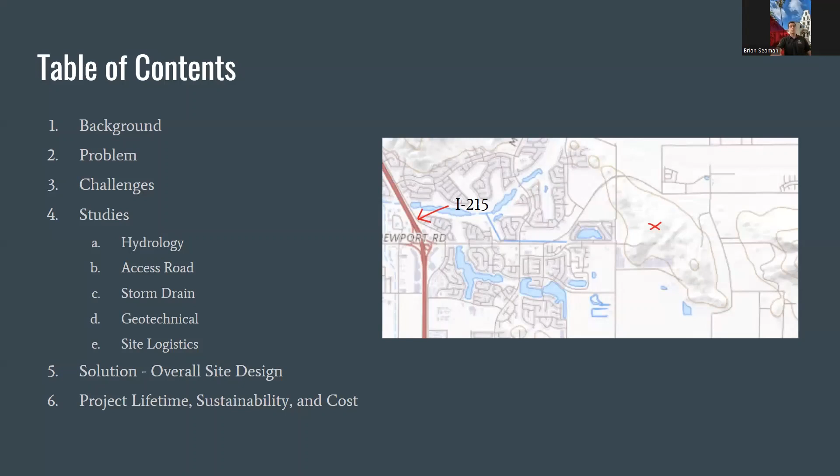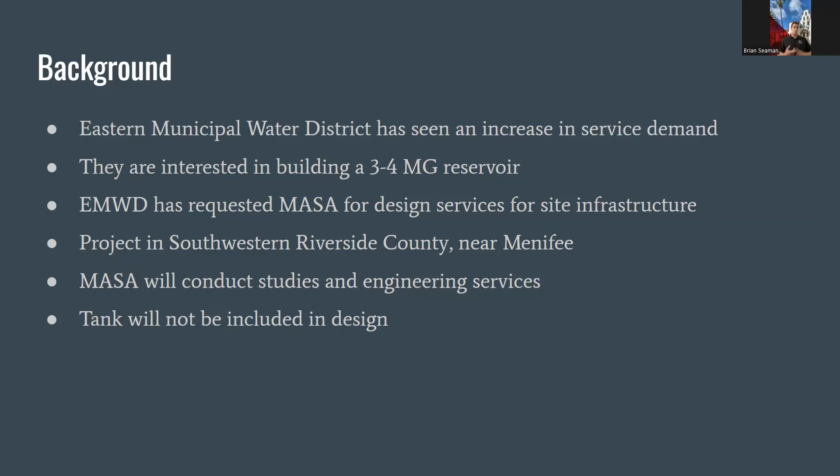So talk a little bit more about what we're doing here. Eastern Municipal Water District is a water district in southwestern Riverside County who currently operate about 80 water reservoirs. These are anywhere from 3 to 4 million gallons. We'll be doing a site civil infrastructure design for a 4 million gallon reservoir located in southwestern Riverside County near Menifee. And again, the tank will not be included in this design. This will be just looking at access road, ring road, and site civil needs such as storm drains, water mains, etc.

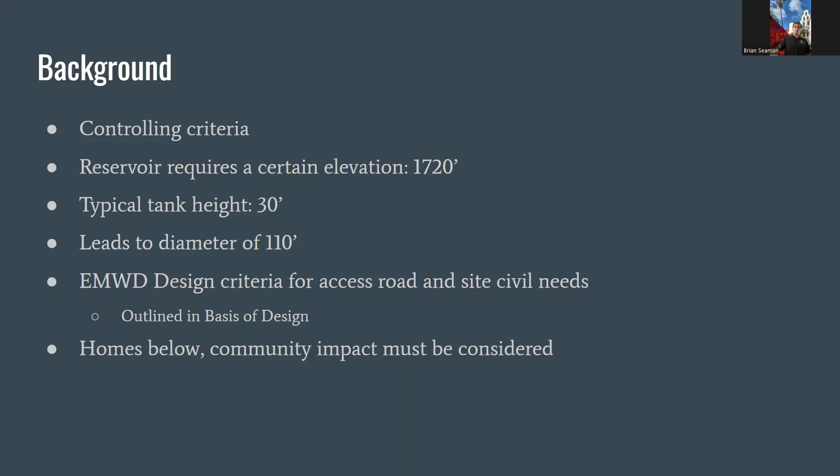Specific to this project, each water tank that EMWD is doing requires a high water level. And this tank's high water level is 1,720 feet. So typical tank heights are shown on the screen, and these are going to lead to an elevation, which is going to be 1,690. So that's a location that's going to be important on this hillside to be looking at because we need to be at that elevation for an effective design. Furthermore, below this hillside, there's some homes below, and we have to think about the community impact when we're doing the design for this project. So I'll pass it off to Blake to talk a little bit about the challenges of this project.

Yeah, so some of the challenges on the project was one, there were some radius issues when we were designing the access road. There's also challenges due to the terrain of the hillside that the access road was going on. There are also visual impacts to placing the tank and the access road on the side of the large hillsides. There's also issues addressing sustainability due to the project not being fully complete. And the type of soil on the project site also presented a challenge due to runoff.

So some of the studies we performed for this project were access and ring road studies. We also did a geotechnical study. We performed hydrology study, storm drain study, and also created a site logistics plan.

Moving into the hydrology study, the first thing we identified was that our site's located near a tributary to Lake Elsinore. That is Salt Creek, which you can see outlined in purple, with the floodplain area. This can present a big risk for debris runoff going into the drinking water, as well as other pollutants, as well as a flood risk for surrounding communities. So it's really important that we keep all the water that comes off of our site contained.

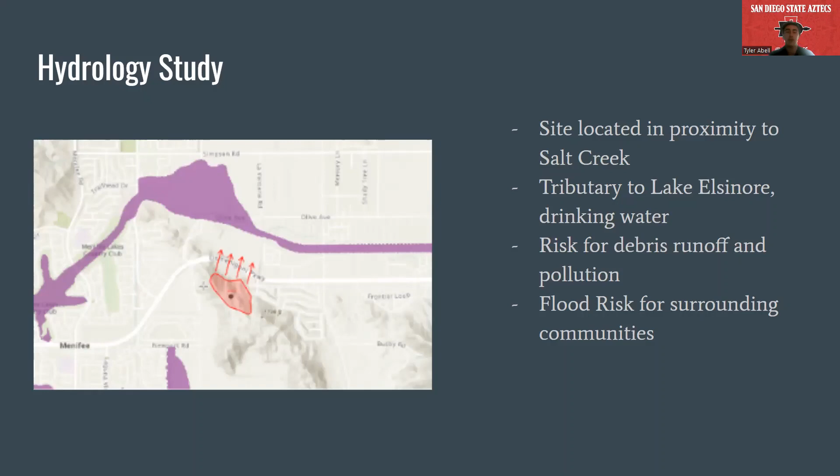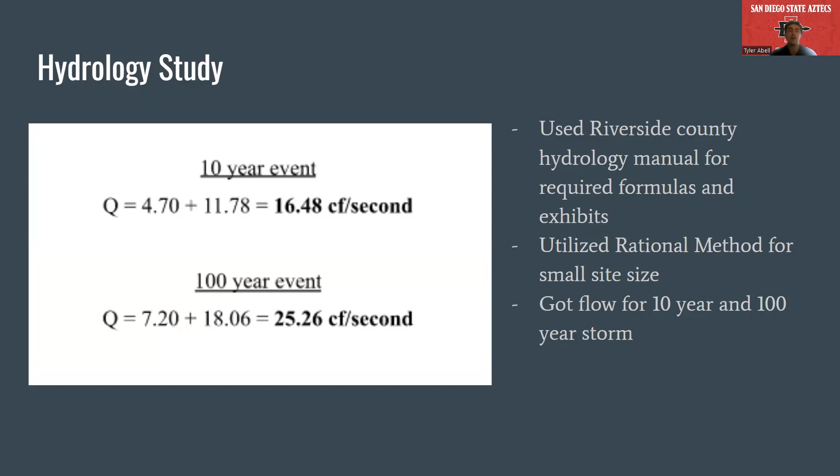In order to know how much is coming off of our site, we use the Riverside Hydrology Manual and the rational formula to get a total discharge, which is the total cubic feet per second of water coming through our site during a 10-year and 100-year storm event.

So I'll talk a little bit about how we set our access road. So all of the design criteria that we are using were at the very minimum for Eastern Municipal Water District. We also exceeded some of their standards. Some such standards include that our maximum slope was 12%, whereas the maximum slope required was 15%.

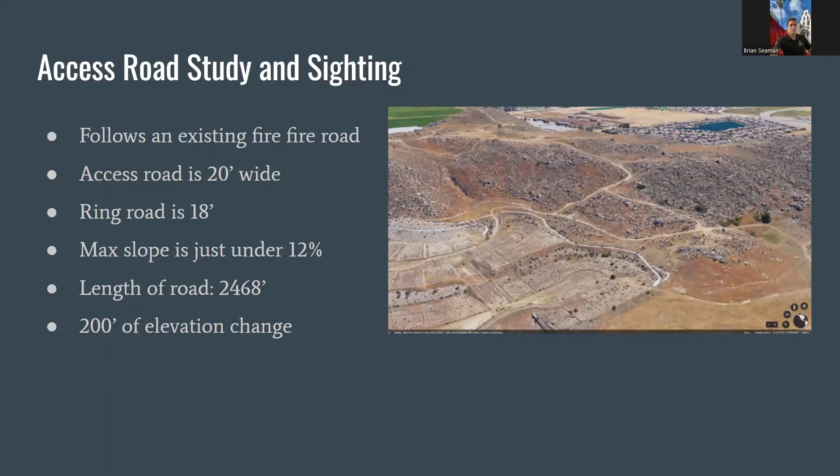We ended up designing a road that is about 2,500 feet long with 200 feet of elevation change that follows an existing fire road that you can see there at right. And I'll pass it back to Tyler to talk about the storm drain study.

So we're going to see a similar process to what we did in the hydrology study, the storm drain study. We're going to determine the peak discharge from a tank overflow event using the rational formula again with a pipe diameter of 24 inches and a velocity of 2.5 feet per second. We're then going to add this discharge to the original discharge we got for a 10-year storm. For us, this came out to about 20.41 cubic feet per second,

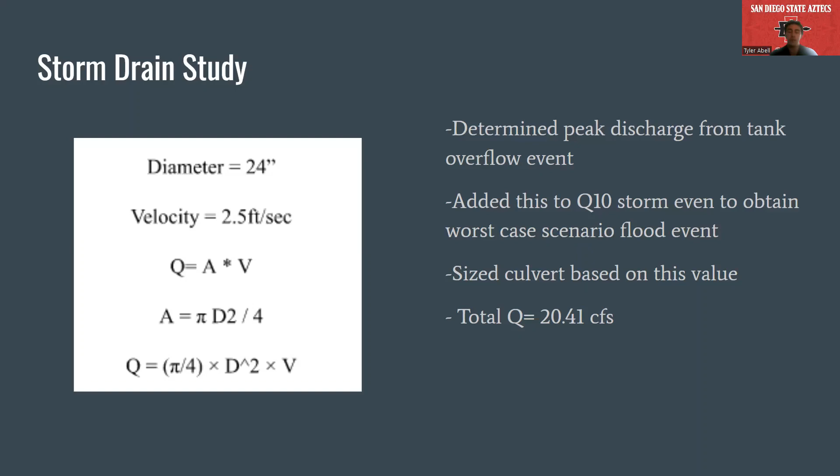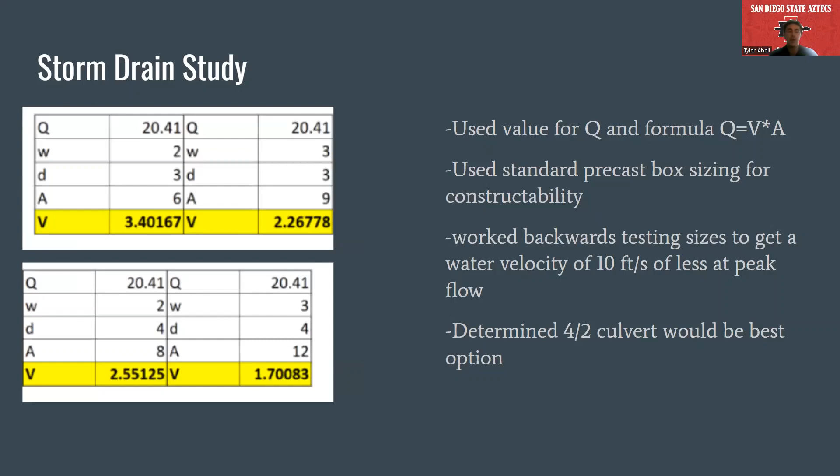and then we're going to use this to eventually determine the sizing for our culvert. We worked backwards with standard size culverts and our total discharge in order to determine the velocity of the water that we felt would be appropriate for our culvert. We ended up settling for a 2x4 culvert with a water velocity of 2.55 feet per second.

So getting into the geotechnical study, there are no active faults that traverse the project site. However, there are other faults nearby that may impact the project. A number of materials were encountered when we were exploring the project site. And after our explorations, we determined little potential for settlement due to us not encountering any water.

And for the pavement design of the access road, we based our design off of the AASHTO pavement design manual, and ultimately we came up with a design of 4 inches of asphalt over 6 inches of Class 2 base.

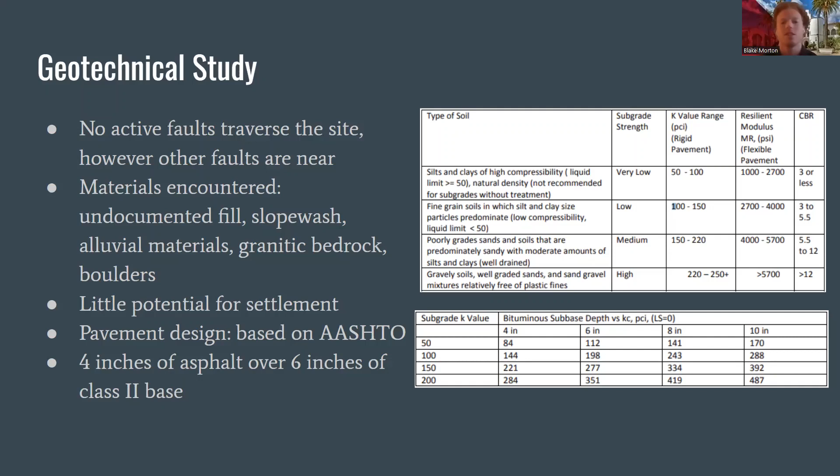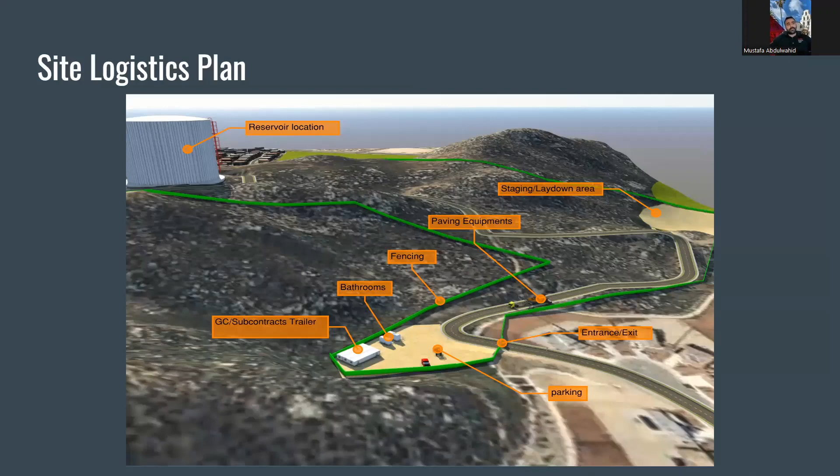Yeah, so now we're going to do a little summary of the solution to the overall site design. The access road is going to follow the existing fire road. This is going to limit the amount of grading we'll have to do to put that in. The storm drain is going to parallel this access road. This is to limit the amount of slope and water velocity. We're going to keep it to about 10% by following the road.

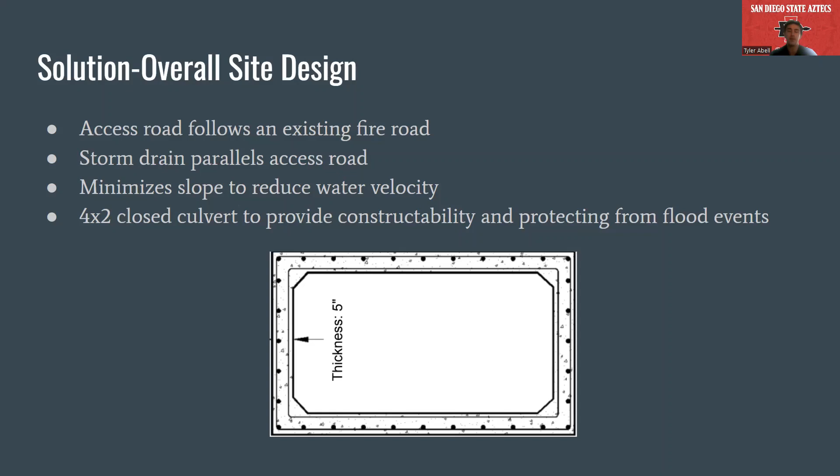And again, we're going to use a 4x2 closed culvert to provide constructability and protect from flood events that are unpredictable, keeping that over the top protection. Furthermore, the water main and the electrical conduit are going to take a little bit of a different approach, but they're going to be installed together to limit the amount of work done there.

The storm drain utilities are going to tie into the existing Ridgecrest road facilities, so those will not have to be reconstructed. This can improve constructability, cost effectiveness, decrease the amount of time spent on the project during the construction phase, and reduce the community impact.

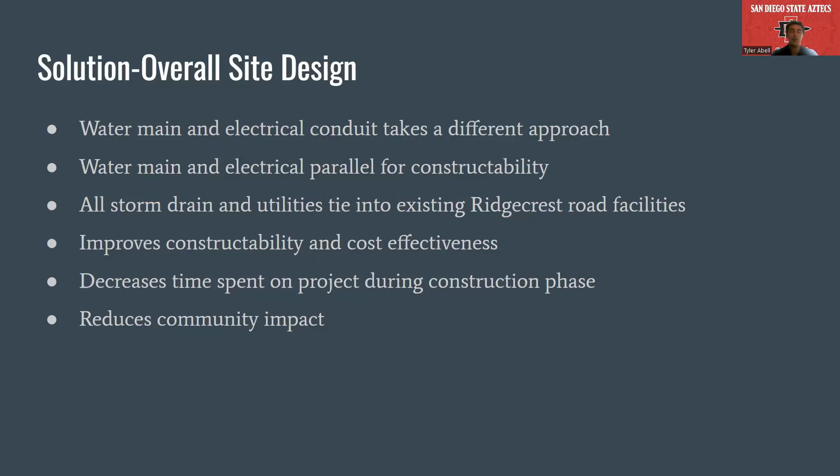Project lifetime is uncertain because the tank is not included in the scope of work. And for sustainability, solar panels in the future can add to the efficiency of the project, and also the existing infrastructure in the location is going to decrease any environmental impact.

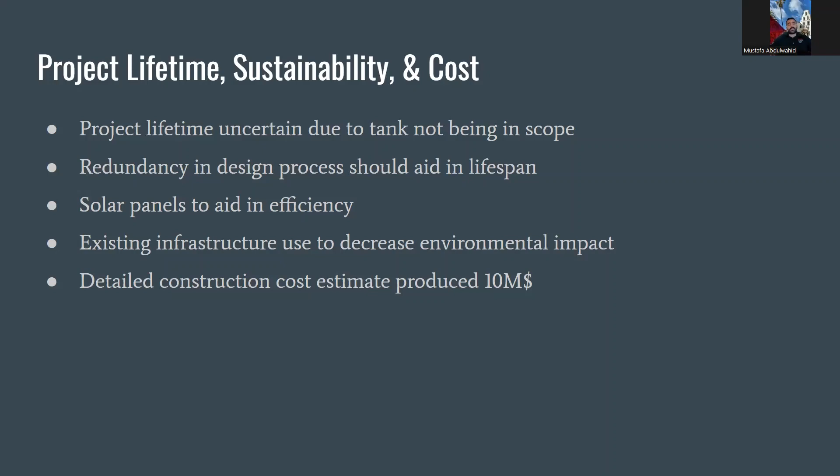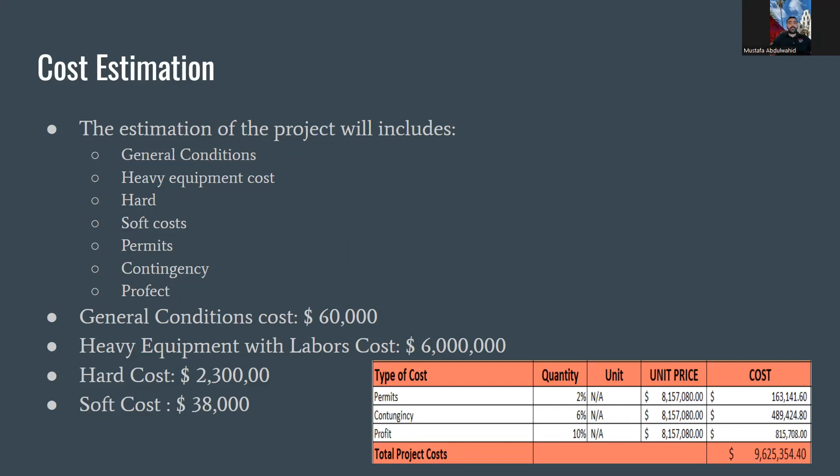And for the cost, the detailed construction cost for the project is going to be $10 million, as shown in the next slide. So the cost is estimated across the general conditions, the heavy equipment for the project, the hard and soft costs, the permits, and the contingency of the project. And as shown on the slide, it is going to cost around $10 million for the project. And with that, we're going to conclude.